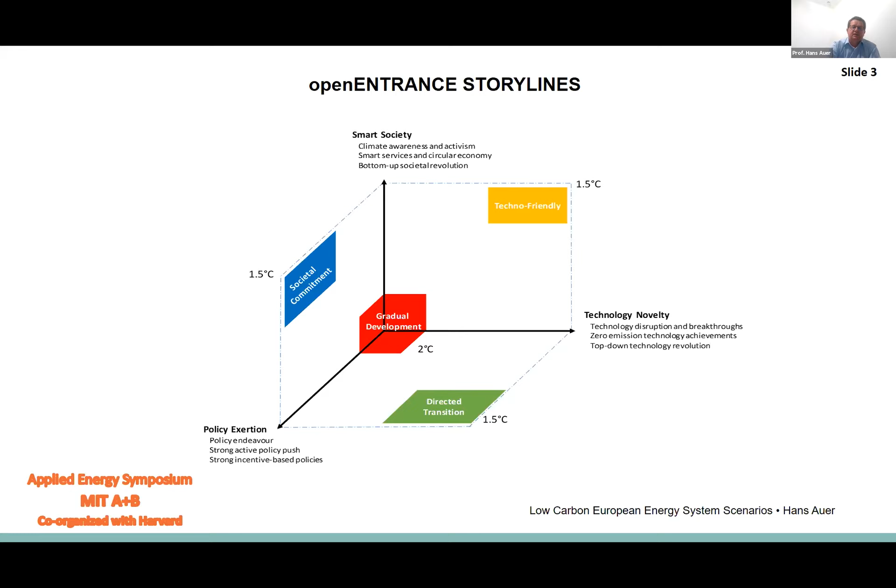But what's very important - we show quantitative results for these 4 storylines, but the open source approach and the overall idea of this scenario explorer we developed is that everybody can conduct their own studies within this three-dimensional cube, putting different weights in the empirical settings of the energy system model.

So here, I won't go into the details of the flow chart of the modeling approach. What I present here is the green part. And it's very important in our kind of analysis.

On the one hand, we had an initial version of this energy system model, the GENeSYS-MOD model, a dispatch and capacity investment model. It builds upon the OSeMOSYS model, developed more than 10 years ago. It is a significant further development, tailor-made according to our needs, not only in terms of functionalities but also granularity and so on. But it's also very important that with our input data settings, we are consistent and coherent with other modeling activities in Europe.

So on the one hand, with the PRIMES model, having conducted a lot of studies for the European Commission, or in terms of the renewable potentials we have, the cost resource curves with the GREEN-X model and so on. In addition, it was also important to conduct a validation of our model and scenario results with the most alike existing pathways, also from the MESSAGEix-GLOBIOM model, to be sure to deliver a robust result. So I will present today the aggregated European results.

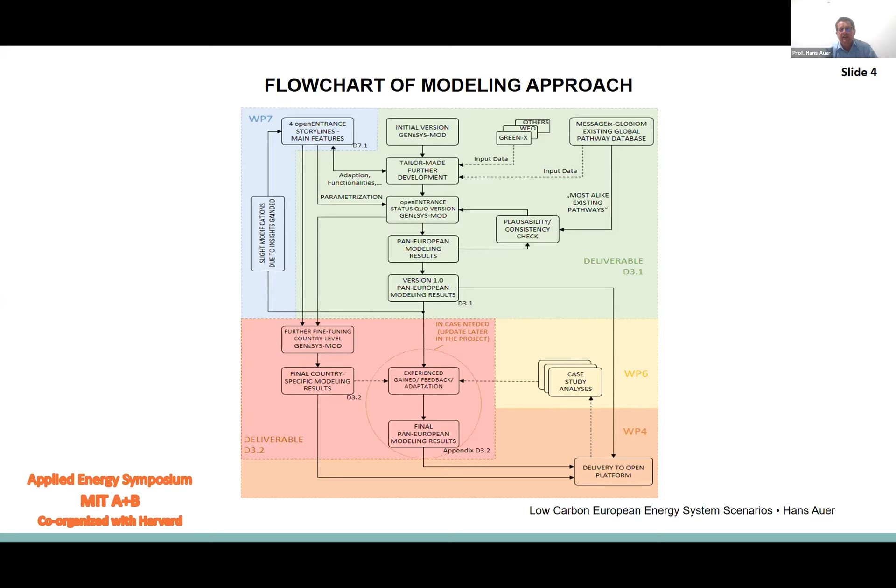We already have the country-specific draft results available, but we'll further work on the robustness of these kinds of results. So the GENeSYS-MOD model - initially it was a simple dispatch and capacity investment model.

And in terms of functionalities, here you only see a short list of improvements we have implemented. There have been a lot further improvements done - from originally 17 regions to 30 plus, and also in terms of temporal modeling.

So from the initial time slices, they have been replaced by a reduced hourly resolution and a time clustering algorithm. This is very important to deliver much more robust results within a feasible simulation time period, 24 or 36 hours or so. And in terms of empirical data in the different sectors and end uses, granularity has been significantly improved.

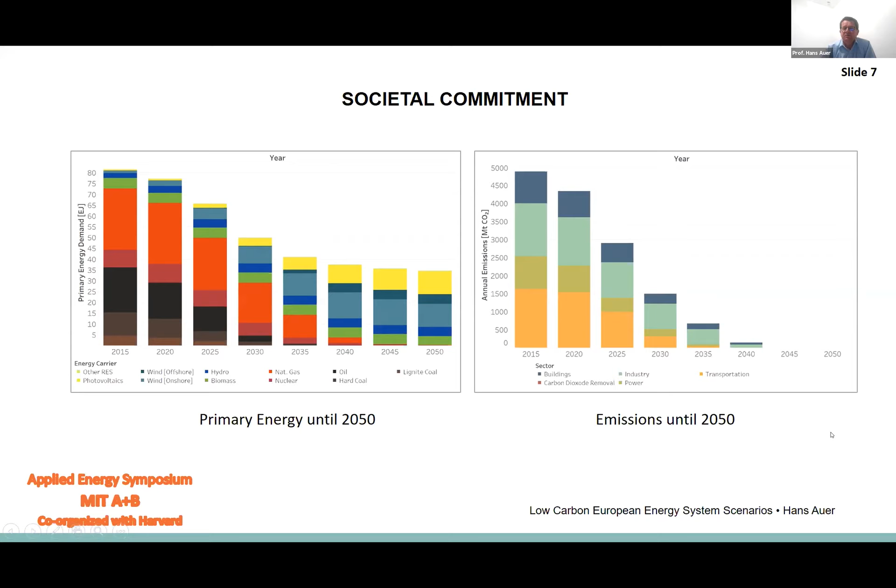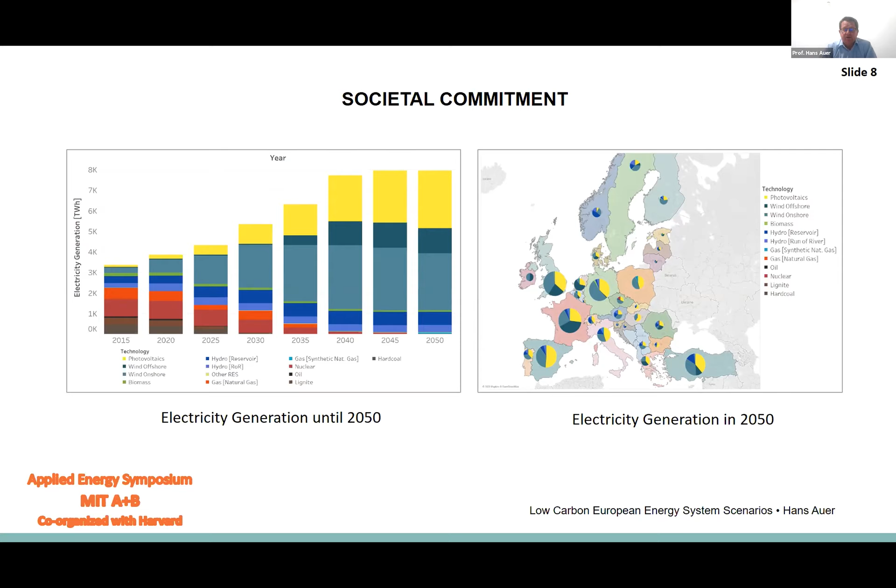And we also used in one of the case studies the URBS model from Munich, which Professor Penson has also been talking about. We rather use it for sector coupling analysis in urban areas and local market clearings, and then upscaling on country level, and then finally, of course, determining the effect on European level.

So here you see, for the societal commitment in the residential sector, in orange we have gas, so we still rely on gas until 2045, and then we phase out and we have a strong switch towards heat pumps, air sourced and ground sourced. On the right hand side, in the industry, we also rely on gas until 2040, 45, and in yellow you also see the strong electrification of the

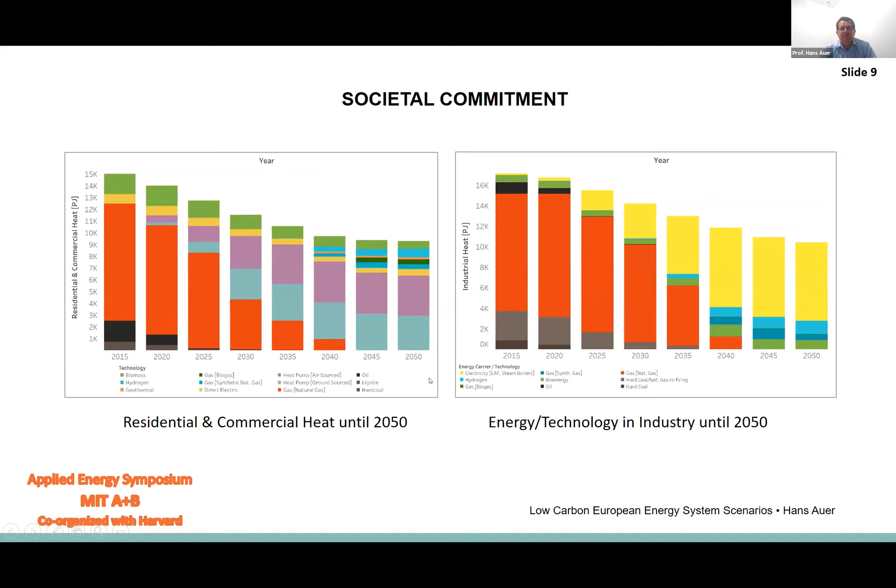industry sector. And the transport sector on the left hand side, the passenger transport, it's straightforward that here we rather rely on electric vehicles, and on the right hand side in the freight transport, as we also heard for California, the heavy duty transport is supposed to be hydrogen based transport, fuel cells, and of course also others.

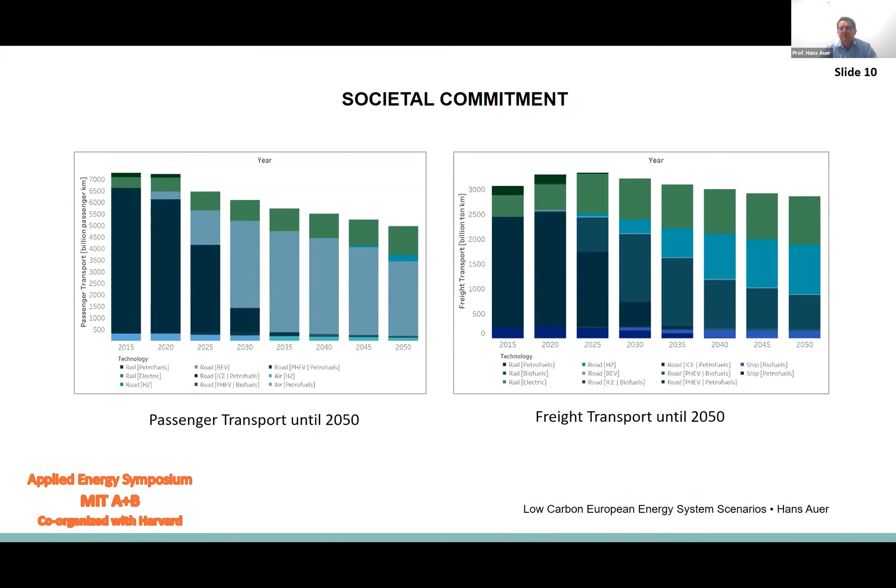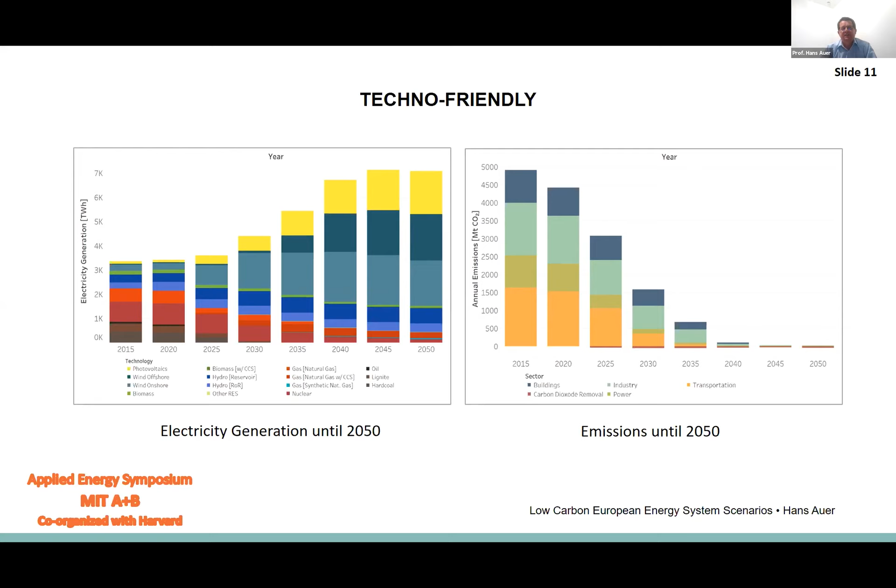So this is more than double the offshore wind scenario of the IEA study in Europe until 2040. So it's more or less aligned until 2040 with the IEA study, but in 2050 it's significantly more, like in a recent study of the IEA.

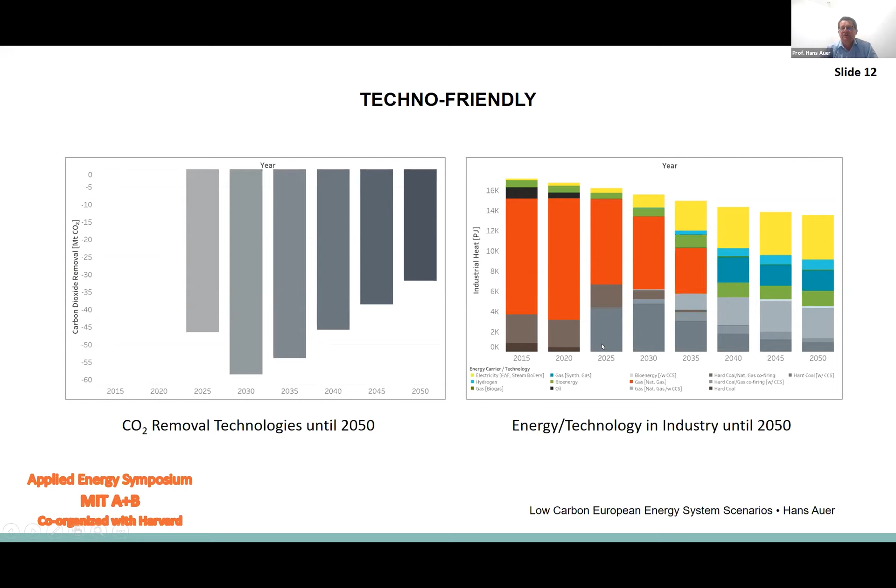And as I said, here we have the breakthrough of technologies like CCS and carbon removal technologies, and therefore on the left-hand side you see the fraction of CO2 emissions we can have, and on the right-hand side you see again the industry sector, and in gray you see still the CO2 we can emit because we are able to handle this in our technology portfolio.

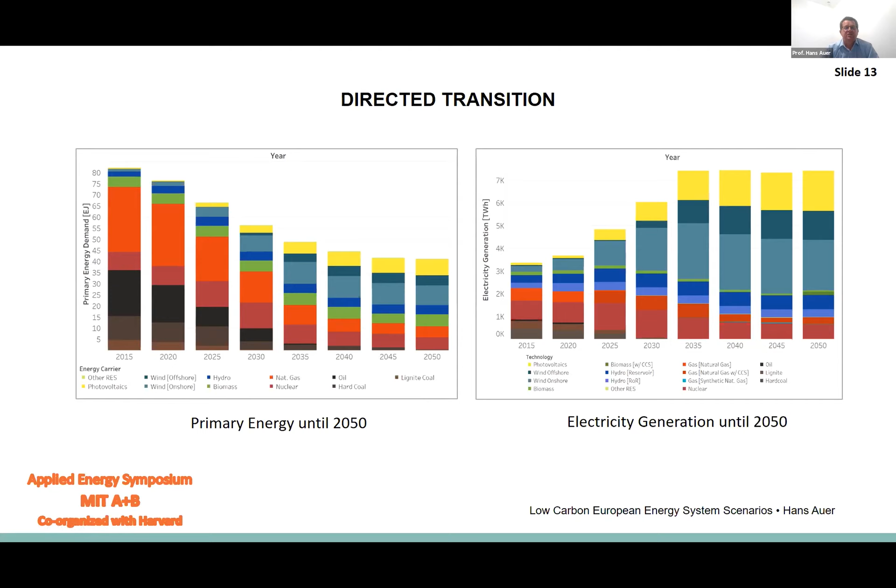And here in the directed transition, again the primary energy also decreases, but the technology portfolio and the fuel mix is much more diverse compared to the remaining two scenarios, and also here the nuclear, the wine red fraction, is rather high, and this represents the phase in or the extension of the capacities in a few European countries based on policy decisions. So not necessarily the cost minimization trade-off result of our optimization model, but we put these policies as a constraint into our analysis.

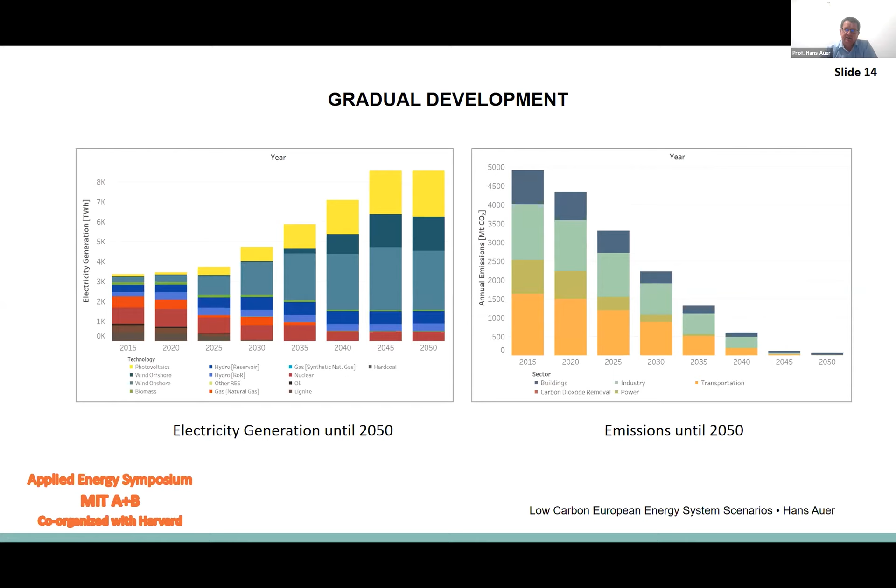And finally, the gradual development is a little bit of each of the remaining three scenarios, but more conservative and less ambitious. And we also see that we need to produce more electricity because electricity demand reduction is not that much compared to the remaining three.

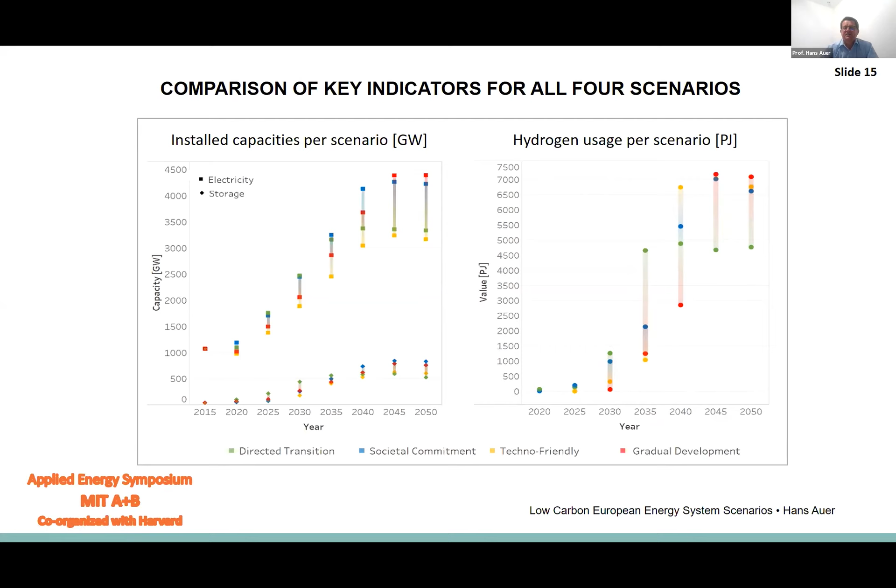And in 2045 and 2050, also for the rather conservative scenarios. So the gradual development, in red here, we see the highest hydrogen production in 2045 and 2050. This is because we have been lazy until 2040, so finally in 2045 and 2050, at very high CO2 prices, the model decides to produce hydrogen to stick to the settings in the model.

And here we see the development of the CO2 prices until 2050, starting from right now, 2021. As I already said, green is the directed transition. This represents the shadow price of the CO2 budget constraint of the optimization model. And here we already start in the next 5 to 10 years with a rather significant and high CO2 price, to be able to

manage this transition. In the other scenarios, we are a little bit more lazy until 2030, but then the remaining CO2 budget needs to be mitigated at rather high CO2 price levels towards the end. So for us in academia or in research, we might not be scared about CO2 prices of 200, 300, 400 euros per ton in the next 10 to 15 years, or even beyond 500, 600 euros per ton in the longer term.

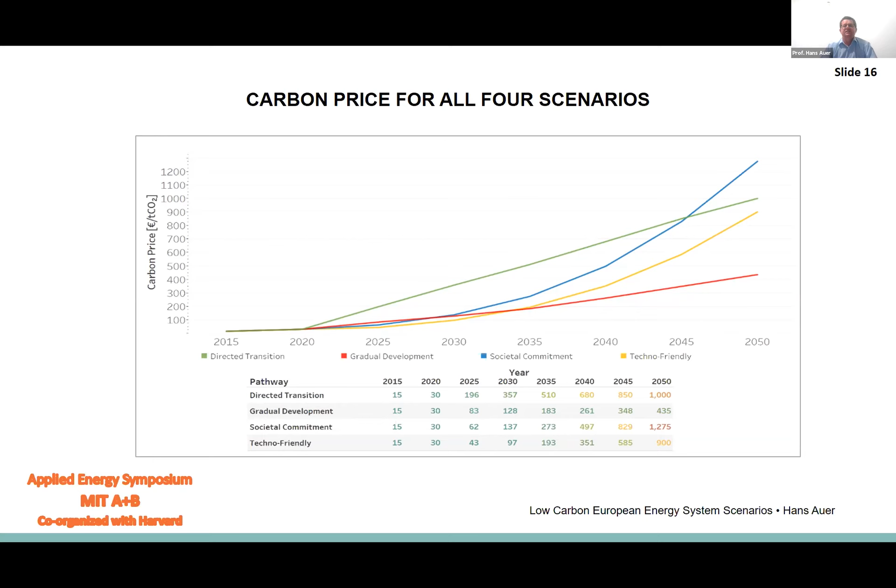But this is more or less the necessity, that the optimization model not only finds feasible solutions, but this is the price signal we need to deliver to the energy and transport system to implement the fuel switches until 2050.

So, my last slide. I don't want to go into details anymore and repeat the results. It's very important that we start right now with the implementation of our policies and the fuel switches. Depending on the different scenarios, we see different weights on technologies and technology exchange rates. The directed transition, the strong policy steering, is the least risky approach compared to the other stories and scenarios I have shown.

There we are still lazy in the next 5 to 10 years and then have to catch up beyond 2030, but then we also rely on being able to deliver the corresponding novel technologies, and this is supposed to be much more risky than starting right now with strong policy support and strong policy steering.

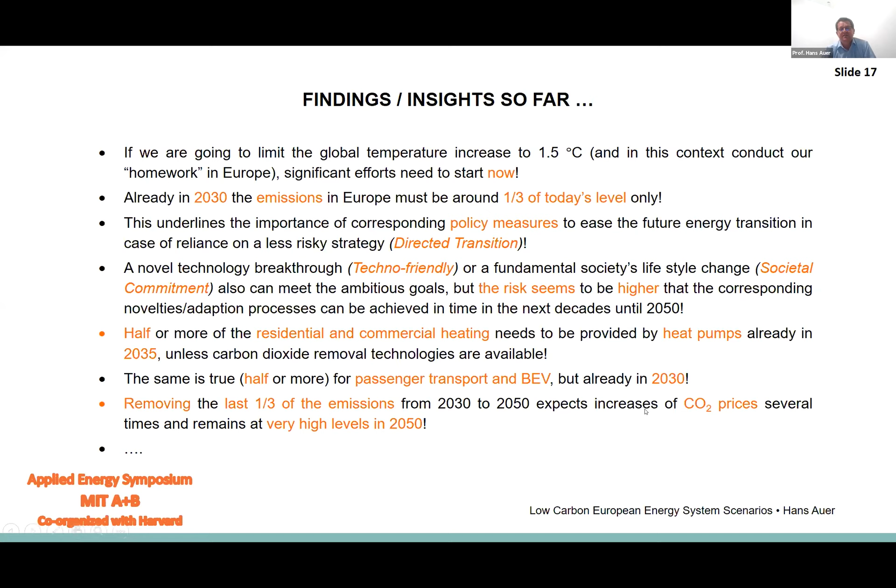And what we have also seen is that removing the remaining one third of the emissions takes place in the longer term at very high CO2 prices. So here we're talking about 500, 600, 700 euros per ton, or even above.

Finally, I'd like to invite you to have a look at the Open Entrance Scenario Explorer. Here you see the link. As I said, it's still work in progress, but we have already delivered these results, and also the GENeSYS-MOD model. It's already available, fully open source.

Of course, we will further improve it, and in the next couple of months we'll also deliver the robust country-specific results. As I said, this kind of analysis is completely free for third parties, and hopefully it is widely used and further developed in the future to accelerate the diffusion of understanding in the communities about these energy transition challenges.